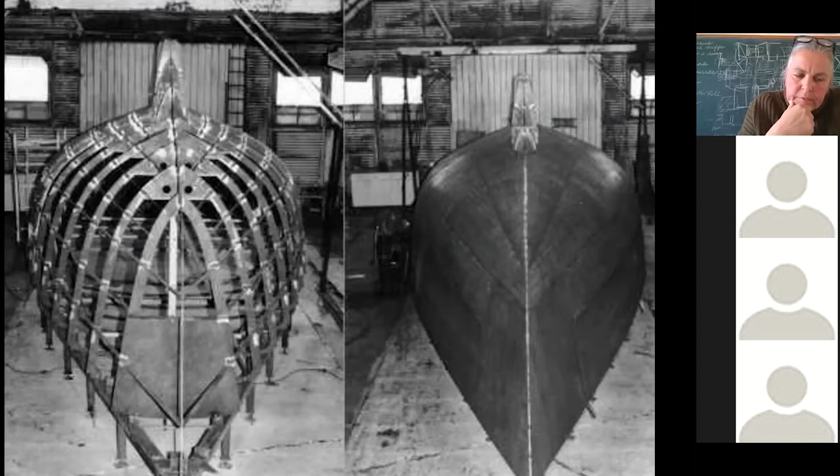To begin with, we suggested a concrete structure. Then we started to investigate the area and quickly learned that there are lots of mechanical wharfs in the Lofoten Islands. So we thought it could be interesting to work with a steel structure. We had only worked with concrete before. And also it felt appropriate that the small building could become part of the building industry in the area.

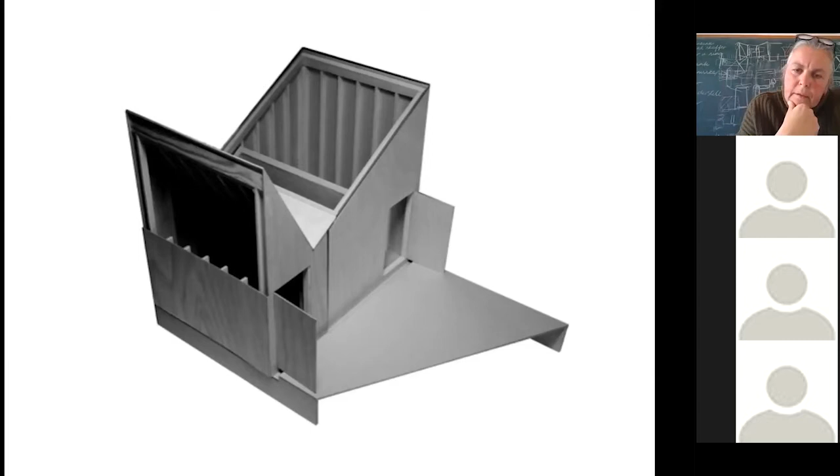So the building developed a bit. It changed from being a concrete structure to being a steel structure clad with a steel skin. Still, there is no view. It's only skylights and a very tall window in the wall, which is placed quite high up.

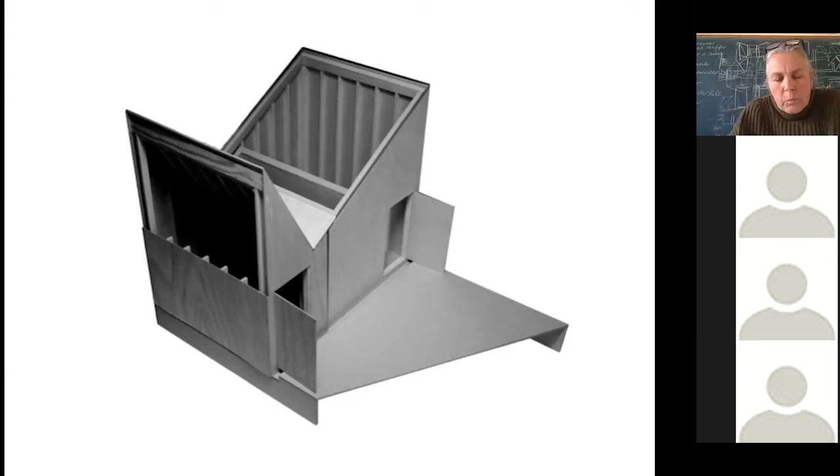Working with the engineer and developing the structure, we soon understood that this building does not need a skeleton. It doesn't need a supportive structure on the inside. And we thought it would be much more interesting to develop the skin to become load-bearing.

This is a building that is closed during the winter, so one really doesn't need much thickness in the walls or roofs. So we ended up with a 10mm steel wall, or actually 8mm steel wall, and the tallest here, which is about 5 meters tall, should be 12mm. And then we developed some bracing for the large surfaces to brace the surface simply.

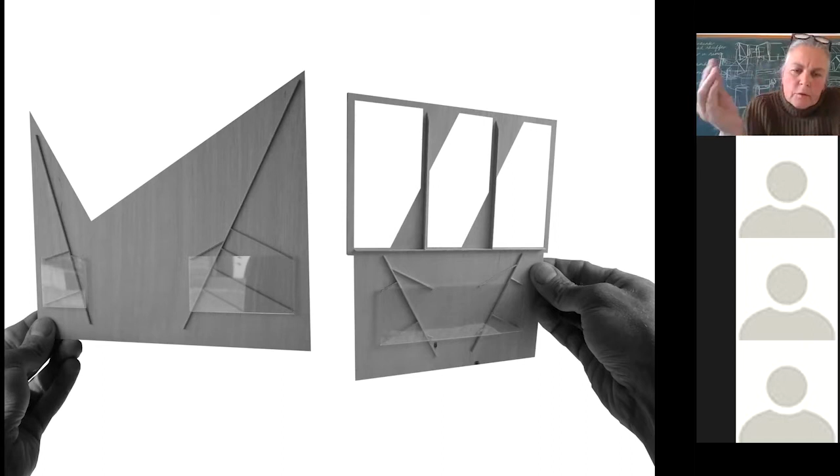And we decided quite early that the steel should be corten steel. There's a lot of salt in the air because it's so close to the ocean, and with the corten steel, the superficial layer would rust and become a sacrificial layer, and the rest of the structure would be okay.

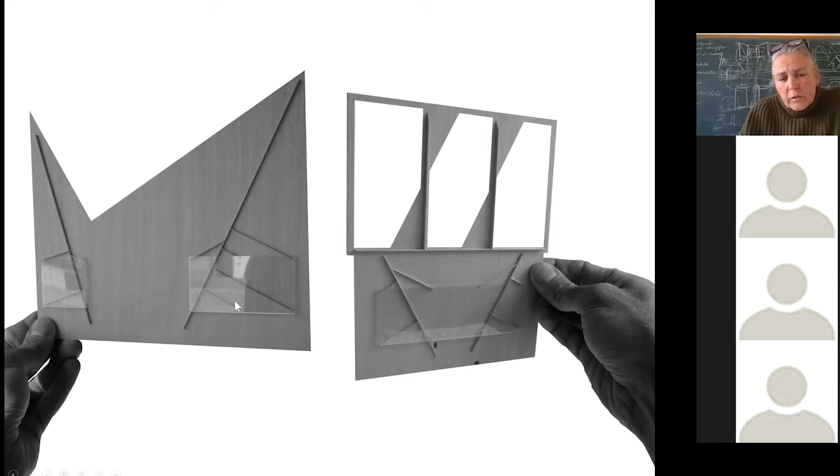What we also understood after choosing corten steel was, of course, that rust is beautiful. It's natural. It ages with the building, the building would age with grace, but you would get rusty by touching it. So we decided that inside the spaces we could place clear glass, so that if you leaned towards the wall, you would be touching glass and not steel.

So the building was made in one of these wharfs, cut pieces welded together to secure that everything was okay, and then dismantled and mounted again on the site.

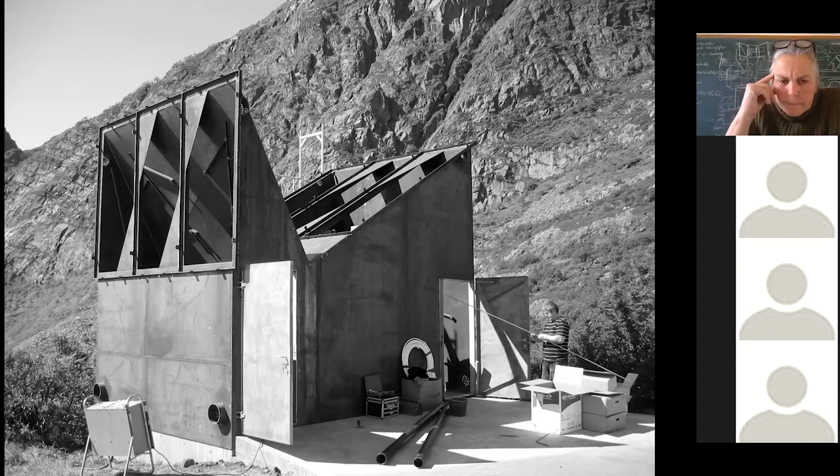I'll get back to these openings that are regular windows with support for large glass panes. We decided to make the flanges of the support larger than they needed to be structurally. The reason for that was to give shape to the light opening.

It's a picture of the finished building. Not so much to say except I can show what it looks like. In addition to the glass, we chose to make the surfaces you touch stainless steel, so you could open the door and go through the door frame without getting rust on your clothes. The roof is shaped so that water and snow will run off, and the age of the building will be visible. So, same in the winter.

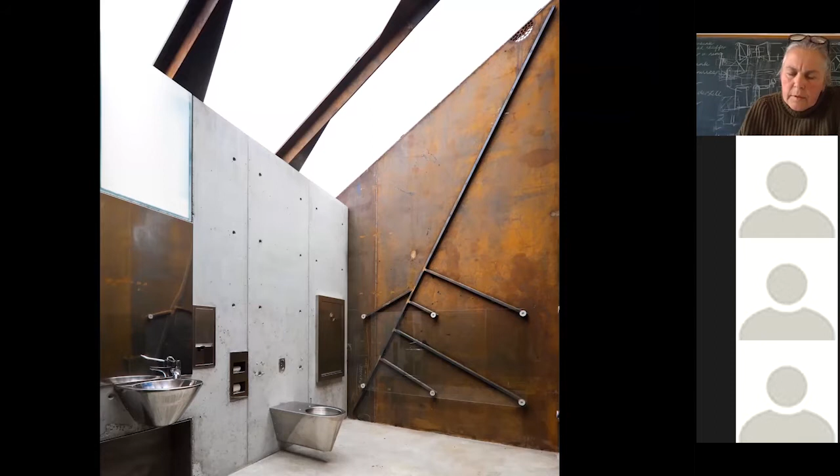One of the toilet rooms and the other toilet room. It's really quite rough. I think it's not important to say anything about our work, but it can be said that we are very interested in details, and we are very interested in how things are made.

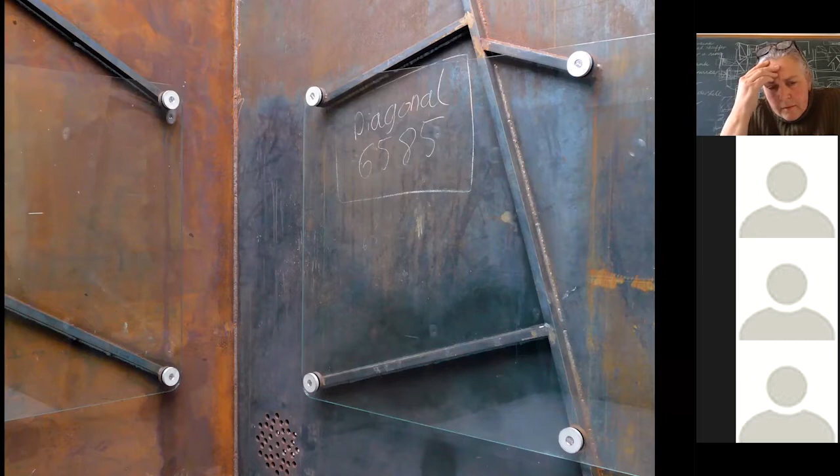We really like the fact that you can read a building and understand the resistance each material has. So detailing is important, but we are not into slick detailing. It's not about smoothness or abstraction. It's really about the quality of the materials and their properties, and the different abilities one has to work with the materials.

And we really like the fact that, for instance, here, notes from the steel workers that have been written on the walls can be saved behind the glass back here.

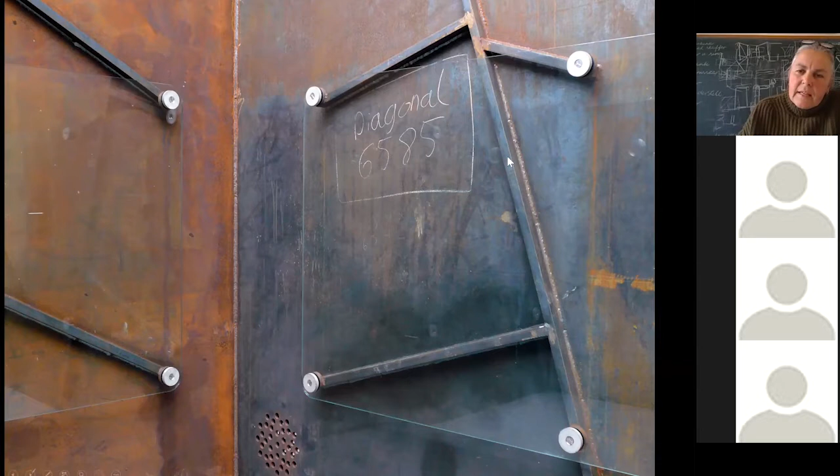I think it's important that architecture both has an internal logic, a way you can argue for your choices, and at the same time has something that is not necessarily rational - some quality that is maybe surprising, an additional and unexpected quality. In this project, I think that quality is related to this sheet of glass.

We discovered during the model work that if you looked up in the ceiling or in this tilted roof surface, if there was a reflective surface up there, one would be able to see the horizon, even inside this very closed space. That is the reason for this glass. We do think that was a quality worth bringing with us.

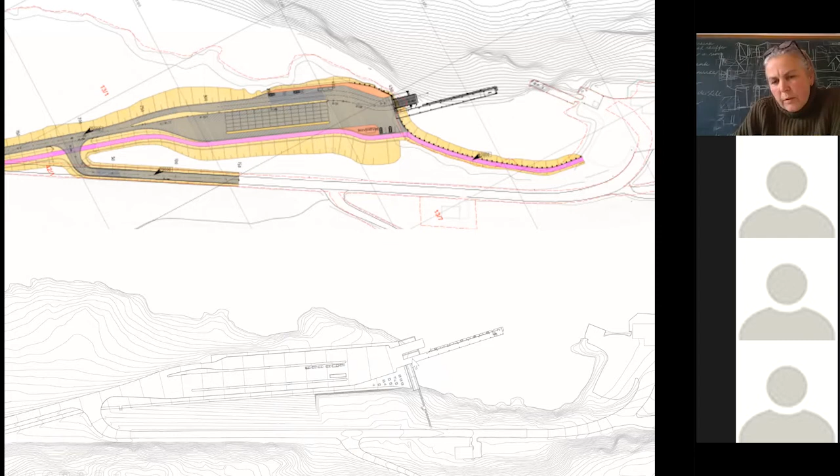And what I will talk about now is this little building. The idea behind this building was very much based on the desire to...

We really wanted to bring the mind of the people who came to this ferry stop across the bay to the other side, where the hotel and the restaurant was. So we thought we should make this little building almost as a portal, which would bring the gaze further on.

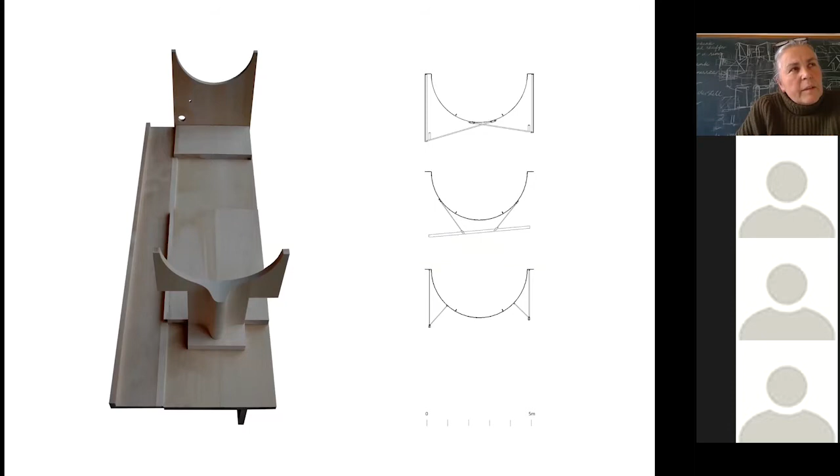Also, I think we had this sort of untalked about but very much sensed feeling of the importance of the large bodies that run in these waters. The bodies being, of course, the large ferries, but also the large mammals that are to be found in the sea, and this strange presence of something larger than yourself.

So we started out with this idea for a building that was like a portal, two in situ cast gable walls, and then one very large inverted vault that could span across from one wall to the other. We were really fond of this curved shape, because it would be almost like the belly of a beast, or a hull of a boat, something that was present everywhere in the project.

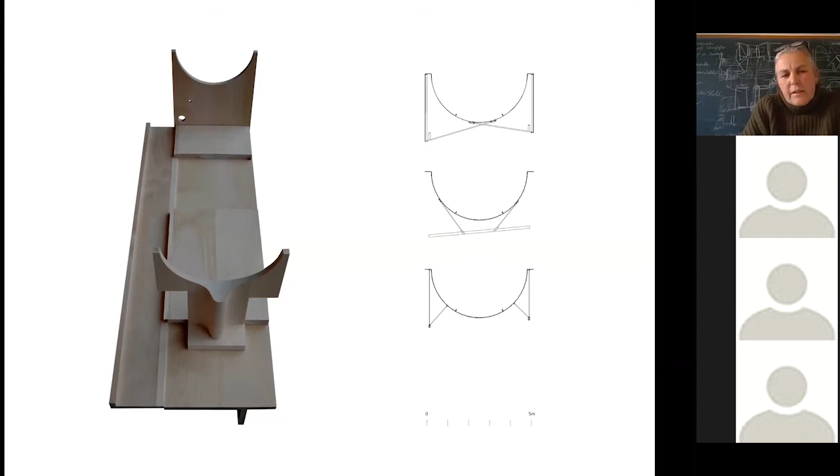So we developed the project along this idea. What we also thought would be very important was to make the building transparent, so that you would see through it to the other side of the bay, but also so that you would see this large body from all the spaces inside, and see all the elements of the building, so that nothing should be covered in a way—everything should be exposed.

Except for the concrete walls that are made on site, everything is prefabricated. That had to do with the fact that the entrepreneur who was going to build this thing had never built buildings before, so it would be better if they would just mount pieces together instead of building something from scratch on site. So all the pieces were made and added together.

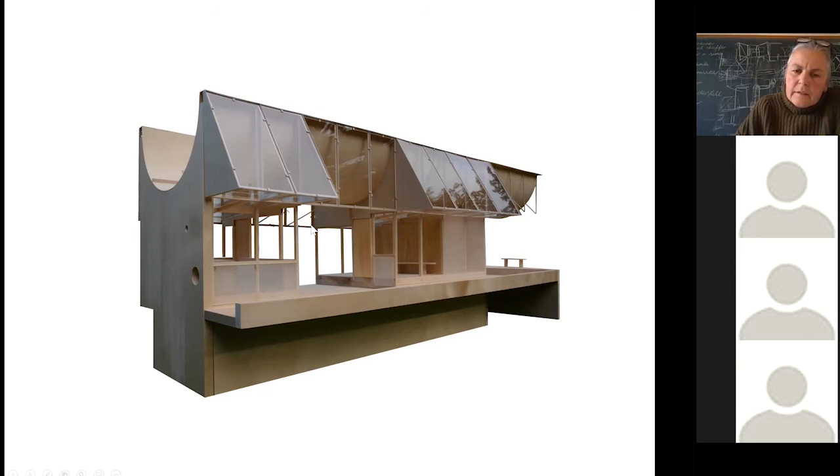The form developed from being this very simple portal to get these other volumes as additions almost, and these are really sunscreens, or they create shadow for these spaces under here. The program is very simple: it's a kiosk, and then it's a covered outdoor area, a waiting room, toilets, and another covered outdoor area.

This is a model photo from the early process, where what we really enjoyed was, in addition to this body floating above our heads, the reflections of the glass—the different glass that would cover the different parts of this building would create, we thought, interesting reflections.

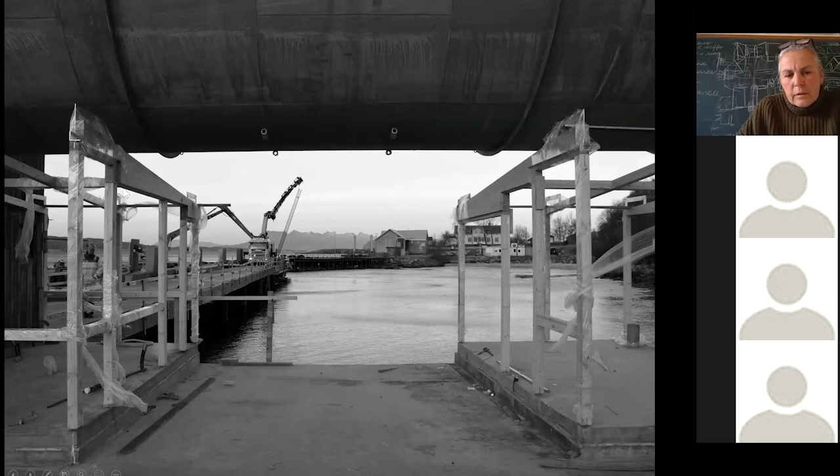So this is from the building site. It's of course important to say that this large vault is also structural—it stabilizes the whole building, which is happening underneath, and it also contributed to these glulam structures being quite slender.

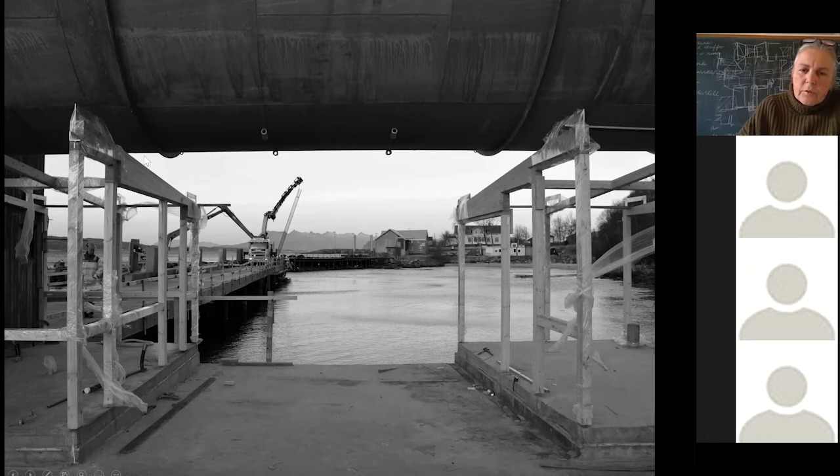Everything that is built underneath is glulam covered in glass, both on the walls and on the roof. There's insulated glass on the walls and also on the roof, so that from the inside you can actually look up to this large vault.

Here you have the finished building.

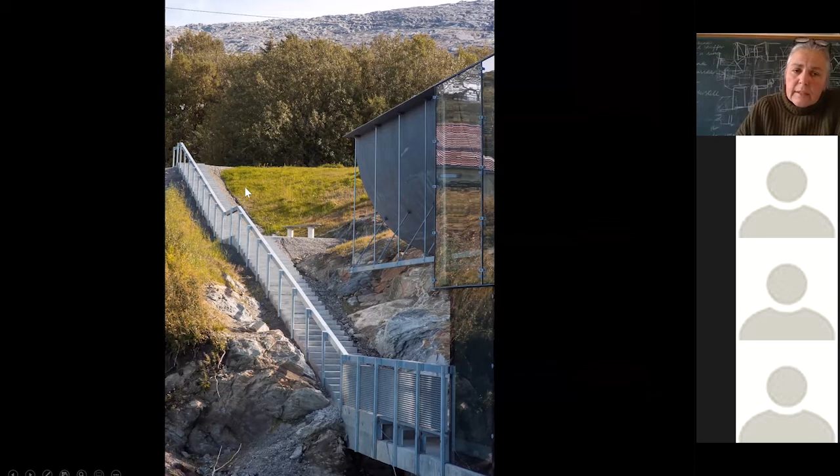And the connection to the sort of road that leads to the cafe. And you see the large vault sort of sticking out through the buildings. I'll get back to that.

Sorry, I have a dog here. I cannot mute myself though.

Here is a paper project. I don't know if I'm going too fast or not, but you'll have to take it as it is.

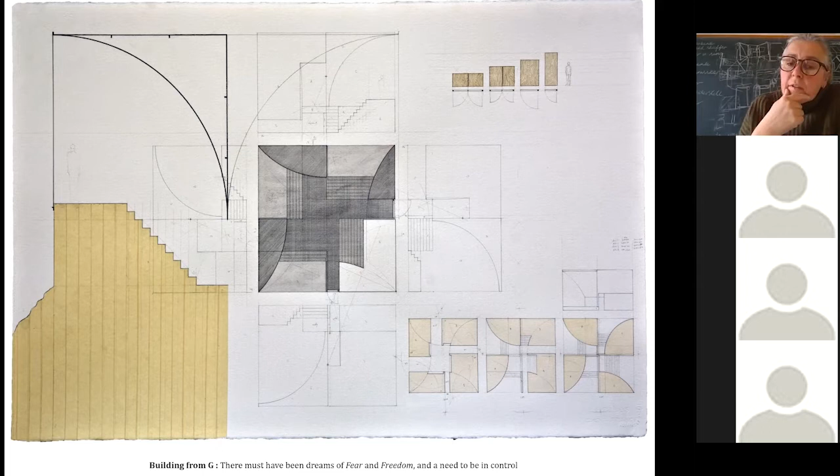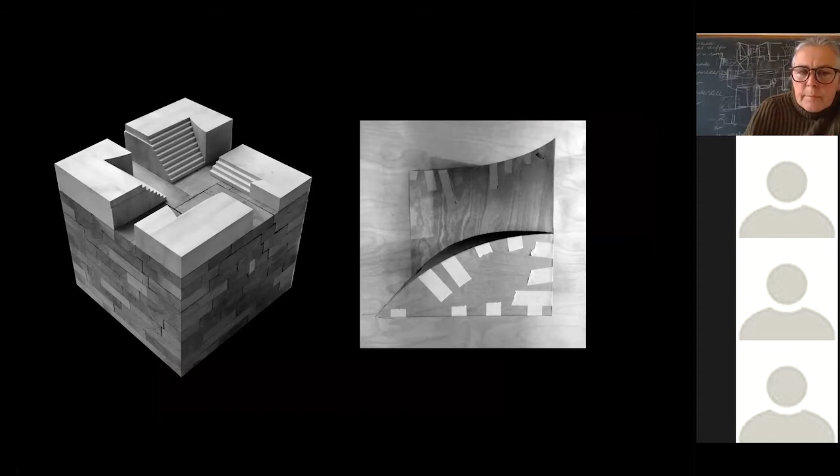Some images of the working process and the finished space. I'll go quickly through these.

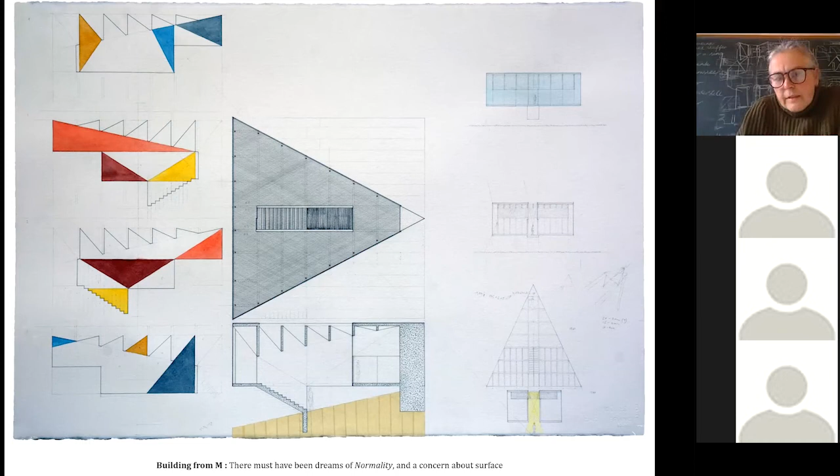This is from the model. We thought that the idea of normality could be established by the way we structurally established a horizontal plane on the tilted surface. This is a model of a building from M.

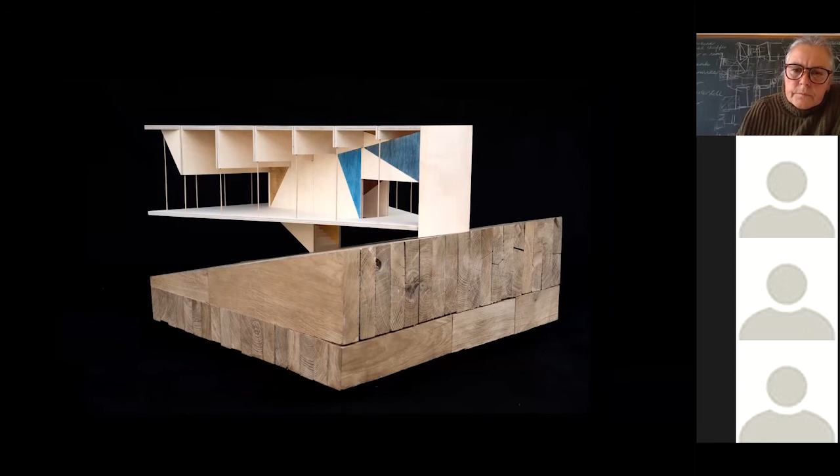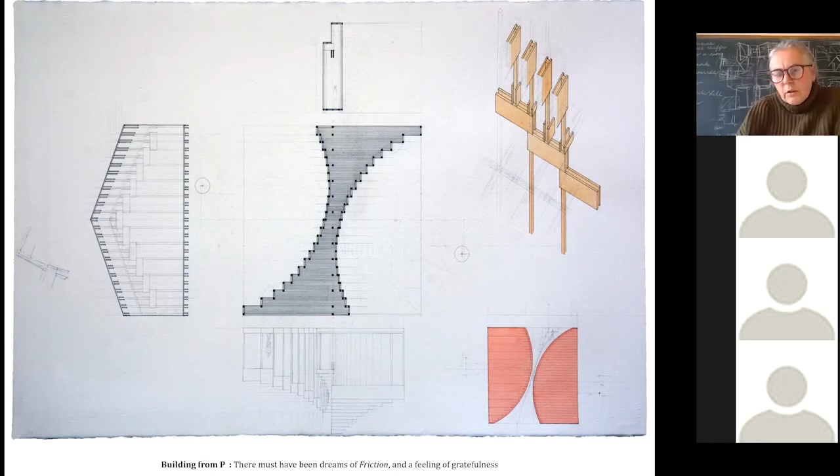This is the drawing for the Ukrainian officer, who had been both an officer and a diplomat and then sent to confinement. We thought that there must have been dreams of friction and a feeling of gratefulness. He became a very religious man, and as I told, he decided to stay on in the cell after release. This is his site.

A wooden structure, quite intricate actually, which works with sort of friction.

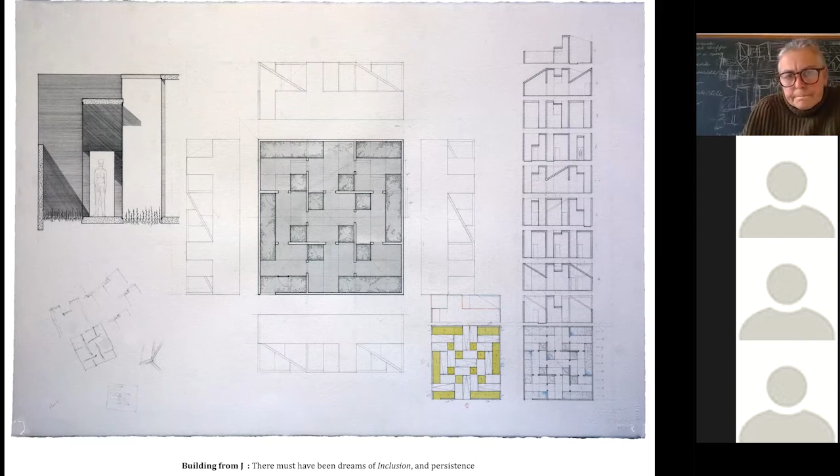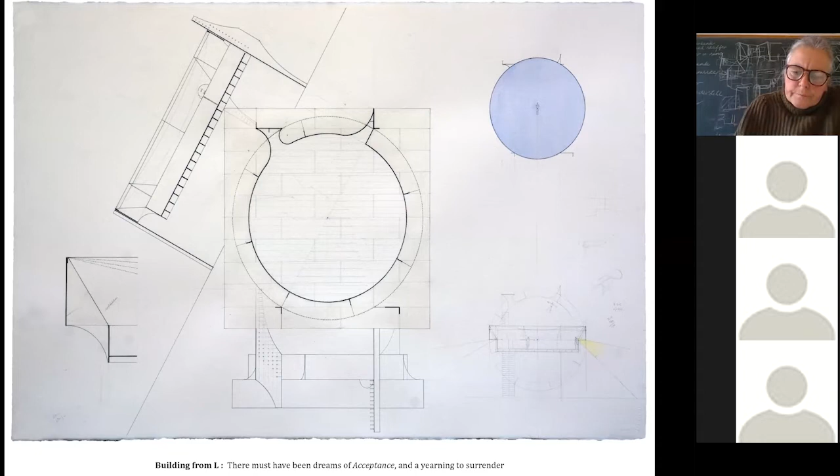This is the site. We have never really decided whether it's land or water. The building is lifted up from the structure. Each of these structures are really specifically made to each of these model sites.

It's standing on the site. It's a structure you climb up into, covered with a large translucent textile.

I said earlier that these paper projects, there are elements from them that we bring onto or into commissioned work. The paper projects, I think all of them work with empathy. It's about trying to understand other people's lives and desires and needs, and speculate about that.

This project, which I will show now, is not yet finished. It's the National Memorial at Utøykaia. I think we would not have been able to do this project if it was not for the paperworks.

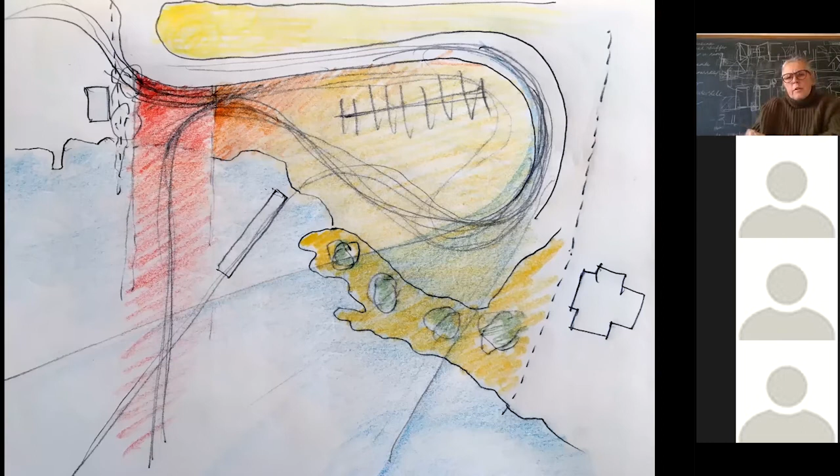This is an early sketch of the project. The site for the memorial was here. It is a very interesting site because it's a very pragmatic site. There's lots of arrangements on the island.

It's used to teach kids about democracy. So there's lots of buses coming up here, parking up on the road, and the kids are taken over to the island where they are schooled. There's also lots of other things happening out there. So this parking lot is important in the life of the island.

At the same time, the National Memorial should, of course, also have its own place. So we started suggesting a new access road to remove everything that was there, with new roadworks, bringing people down to the dock area over here, so that one could park the car, park the buses, get on the ferry, and then find the most important site, the memorial, at the very end of the site, which would then not be so affected by all the traffic.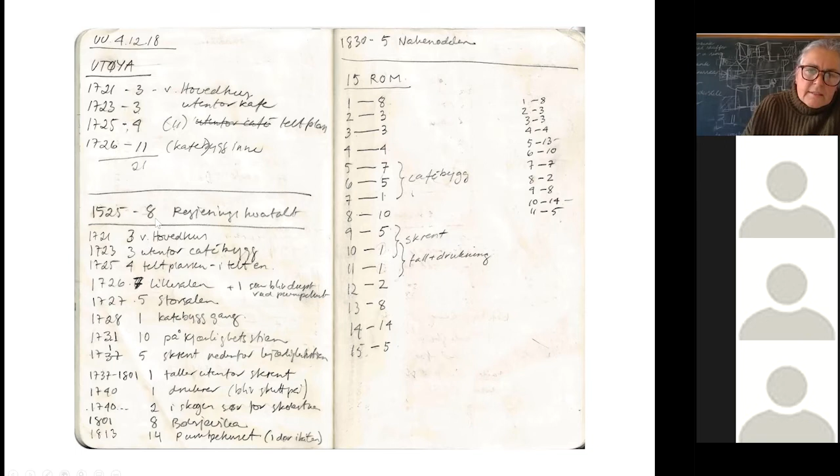To find the form and make a narrative, we started to look at the incident itself, where the people had been killed, because this was really very public — there's been a lot of representation of the timeline of the incident. So we studied the timeline, we studied the places, how many people were killed in the different places.

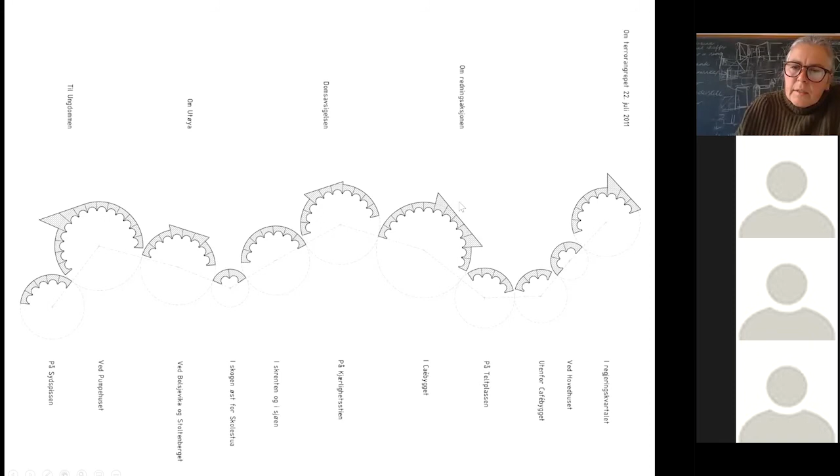And we came up with an idea of a wall that consisted of apses made of stone, one stone for each victim, and each space represented a place on the island. One can imagine this could be a way to understand the incident, and on the back of these walls there could be information about what had happened. The stones could be formed beautifully, and they could have names, one name for each victim.

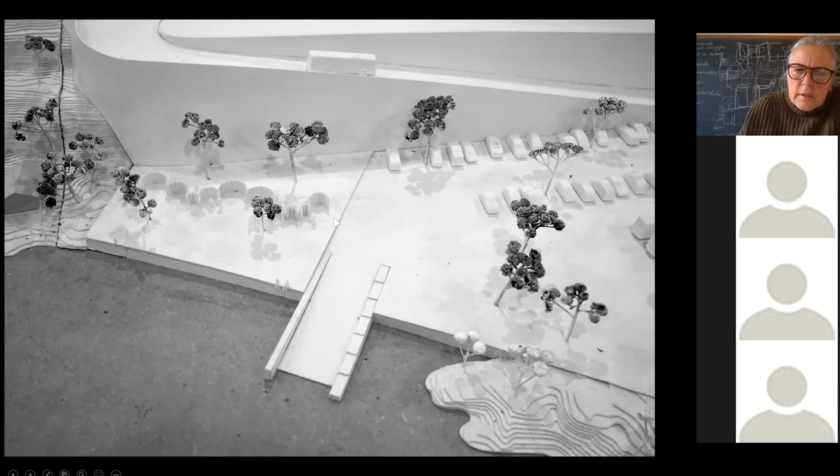Towards the inside there would be several small spaces, one small space for each victim, and also these group spaces for the different places. On the back side, there would be a different order. This is from a working model where you see how this would find its place on the dock. And there was an idea about how this wall could receive light in a beautiful way, and maybe also be a place to place light or flowers or different things to commemorate the victims.

When we presented this, the national reference group were very positive, because it is of course a very brutal interpretation of the situation. The group representing the victims said no, absolutely no. We will not commemorate our loved ones by the place they were killed.

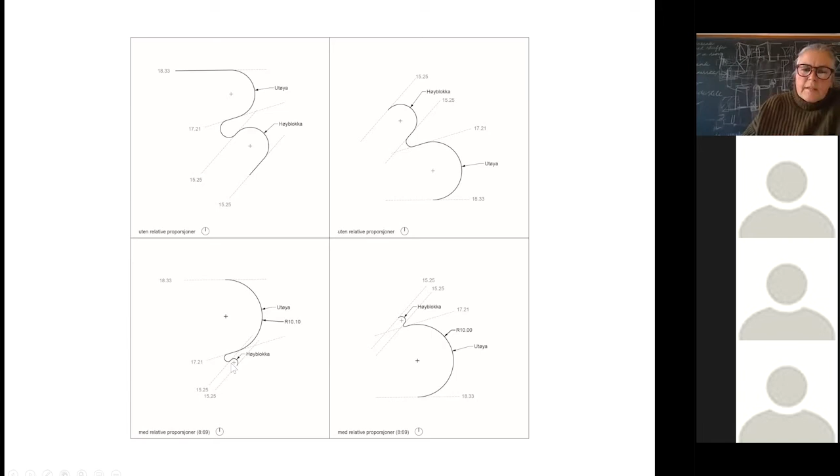So we imagined that we needed a long line along where we could place the objects that were to commemorate the victims. And we started to look at the form of the line, how it could relate to this timeline. One could do it without relative proportions - the 8 victims of the Oslo attack could take almost as much space as the 69 victims of Utøya - or one could work with the two spaces with proportional sizes.

We ended up with an idea of a large stair, which starts out in the water as a dock, a guest dock, to commemorate all the locals that took part in the rescue operation with their boats. Then the stair goes into land and becomes a retaining stair in a way to take a sloping terrain. And on the lowest step, we suggested 77 columns.

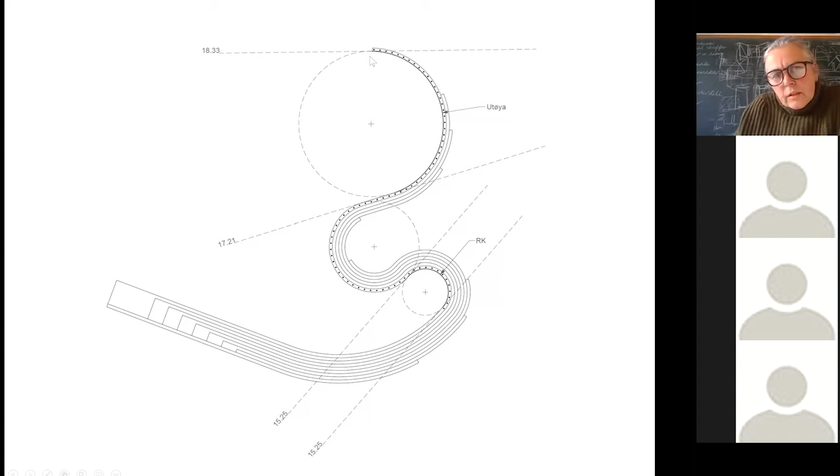In this part of the stair, this little space that is created, there will be no shadow on the ground during the time of the Oslo attack. And on this large space, there will be no shadow on the ground during the time of the Utøya attack. So this is the site plan as it is.

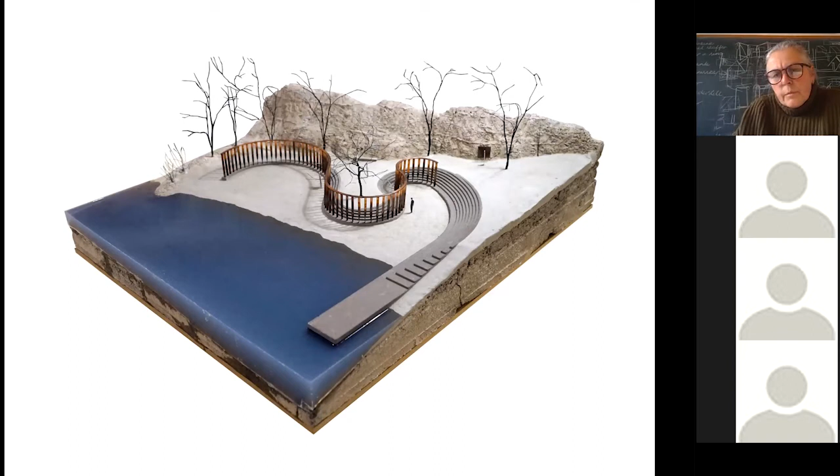I will say just a few words about the development of the columns. There are 77 solid bronze columns placed on the lowest step. We decided to turn each column towards the sun so that it would reflect the light of the sun one time during the passage of the sun. We spent some time studying whether this should be a linear movement or an inverted movement or a sort of random movement.

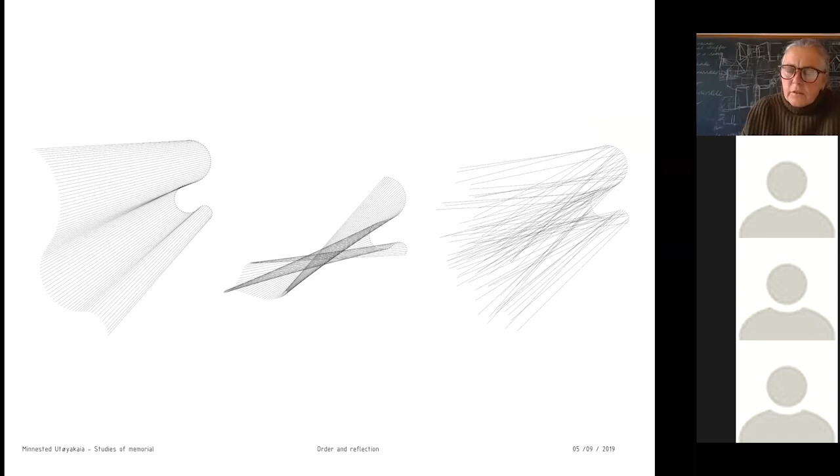We ended up thinking that it is important that each and one of these victims are considered as sort of individuals. So the twisting of the columns is not random, but it's placed not linearly.

Then we started to work or test out different cast models of the bronze. These are actually from the real casting in Germany. I will not show that - these are the real columns, not so important. What can be said is that we think it's very, very beautiful and important that each of these columns is unique, but they are also similar.

On its own, these columns are not structural or stable, but they are connected on the top, and that makes them very strong - a very strong structure. They are made from a quite high level of digital design during the formwork process, and the casting process is of course heavy industrial. Then each column receives a lot of craftsmanship or hand treatment in order to obtain its final form.

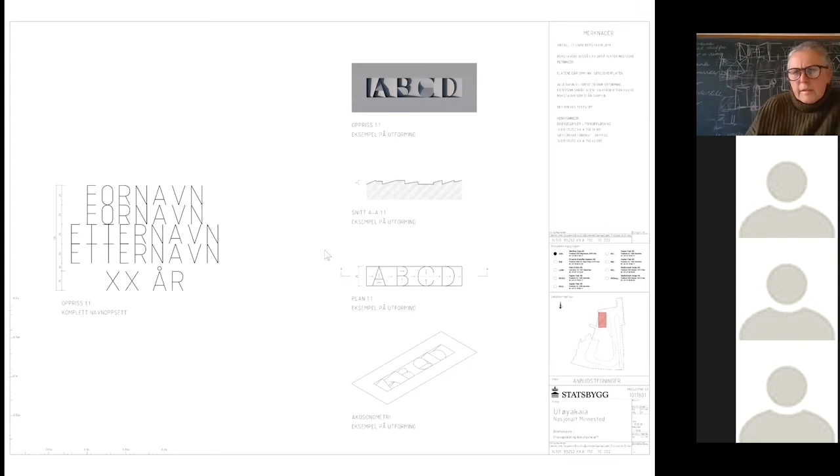We also thought that it's important how we make the names. The names should not be regular letters - they should be cast in the bronze and worked with so that they become unique. So we developed these letters, made of tilted surfaces so that the sun would create light and shadow that would make the name visible. So that is from one of the columns.

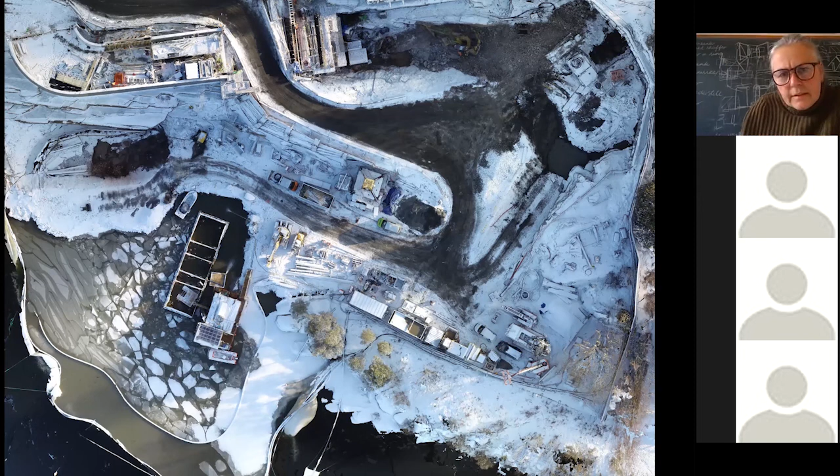And this is the building site as it looks today, or actually two weeks ago.

Final project, something very different: a house in Sweden, a beautiful site. I have to speed up a little bit. This is the last project. A beautiful site, untouched nature, although quite rough and a bit hard to walk on because there's a lot going up and down and only a few flat surfaces.

We thought the site is absolutely beautiful, and we know that building processes change sites. So we thought that here we need to be careful, that we need to build something that does not require a heavy process. We also thought it could be a good solution to make a building that connects the flat surfaces, facilitating the site. We decided to make a building that spans from this cliff here over to this cliff here.

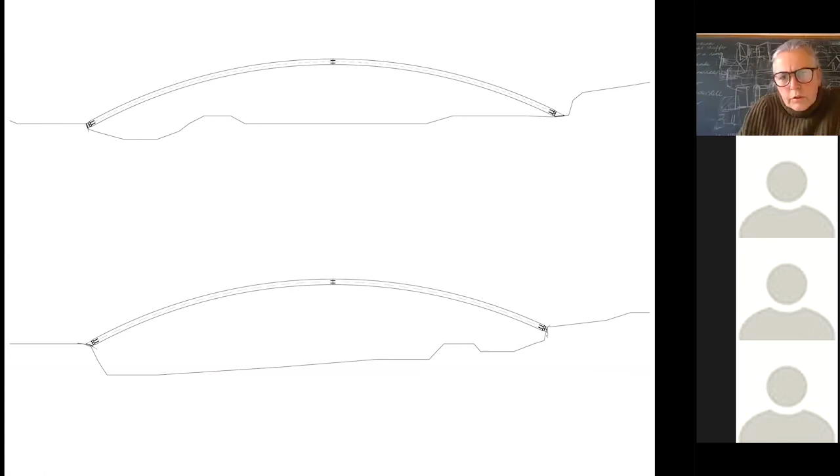It's a 29-meter span, so it's a quite long span. And if you don't want to touch the site, you need to build something light so that it can be transported with helicopter. So these two glulam arches carry the whole building.

What has been very challenging in this project is to work with a structural system that is prefabricated and which needs to fit perfectly in the terrain. So there was a lot of testing and working with finding out the exact positions of the four landing points of these arches. The rock face being very different, the forces of each arch had to come down in the right angle.

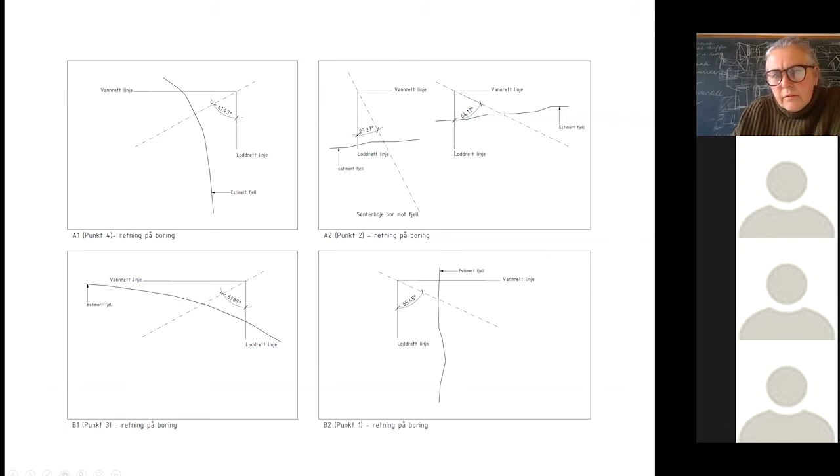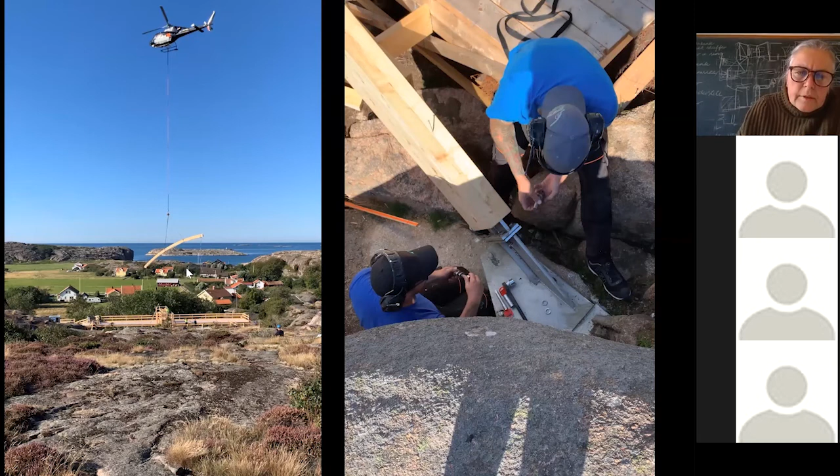So we drilled the holes, we made models of the steel footings to check that everything worked. And it did work. The arches came in place and fit perfectly.

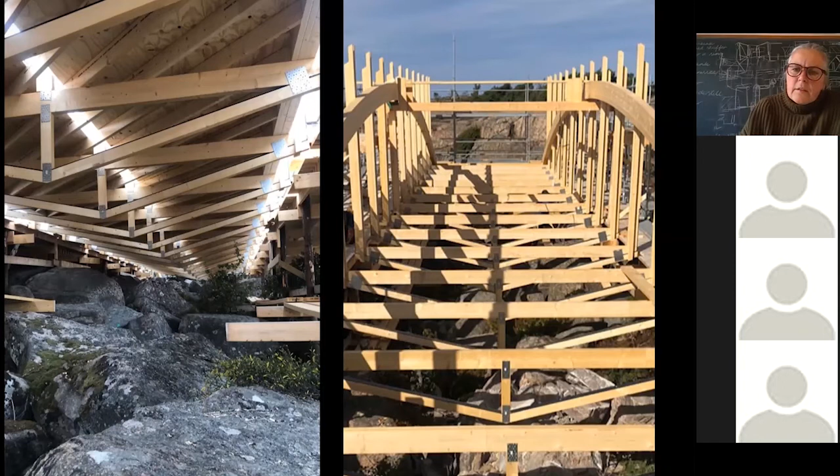So the building is hanging on these arches, hanging pillars connected to each of these sides, and then a floor truss spanning from hanging pillar to hanging pillar, so that the ground underneath the building is untouched.

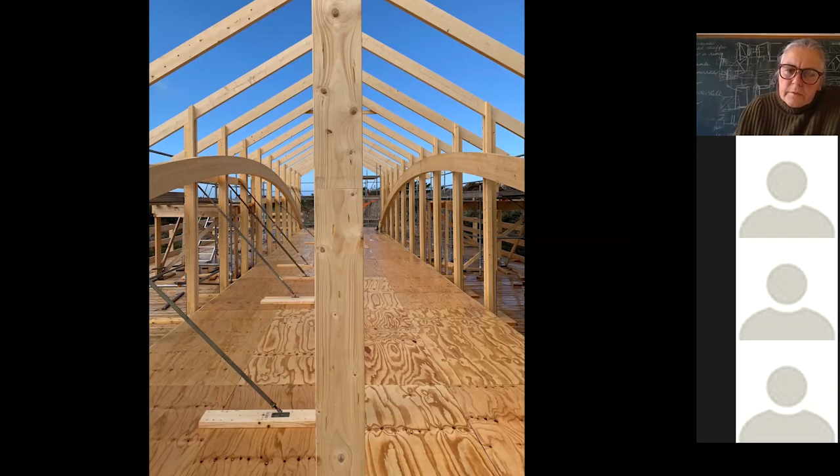A roof that relates to the building regulations. It's a 30-degree saddle roof, which, because of the heavy wind loads, has to have diagonal bracing.

We think it's really interesting and beautiful the way certain decisions set the rules for a project. In this case, the diagonal beams of the roof give very special detailing in the eaves, and the form of the floor gives very special detailing for the wooden paneling.

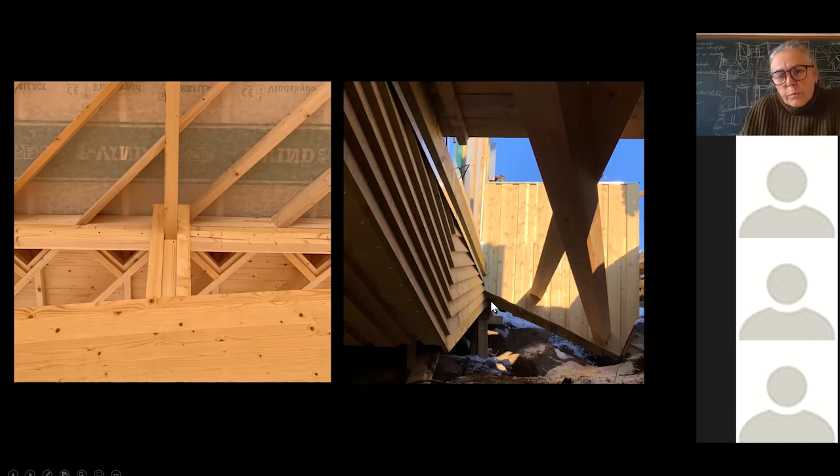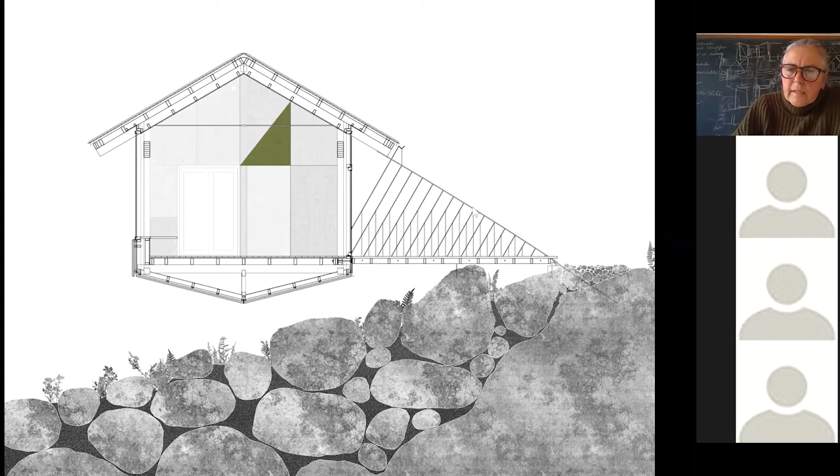Because of the wind loads, which can be both pressure from southwest or tension if the wind comes the other way, the bridge connecting into the land on the long side of the building is formed both to take pressure and tension, but also to become a railing for the floor.